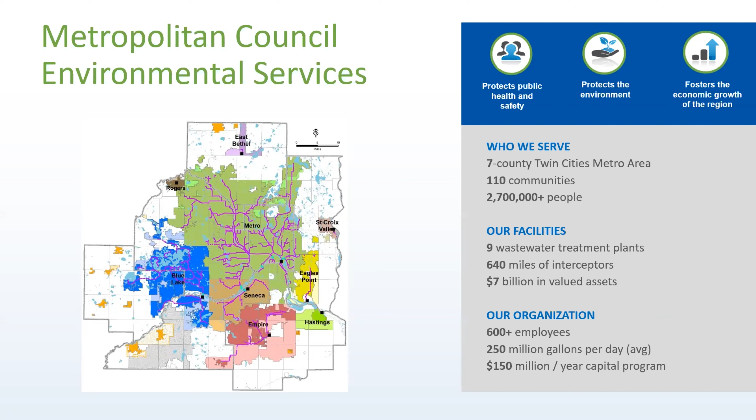And now, after this broad overview into who we are and what we do for the region, I'd like to turn it over to my colleague, Tim Wadeen, and he'll focus on our plans for the Fridley and Brooklyn Park areas. Thank you.

To begin, we would like to explain what a facility plan is. It is a document that summarizes the current state of the existing MCES wastewater facilities. It identifies the need for rehabilitating existing facilities or constructing new facilities. It also determines the potential environmental and other impacts of new facilities. It considers those factors and recommends a course of action. This document is a prerequisite to qualify for financing from the Minnesota Public Facilities Authority.

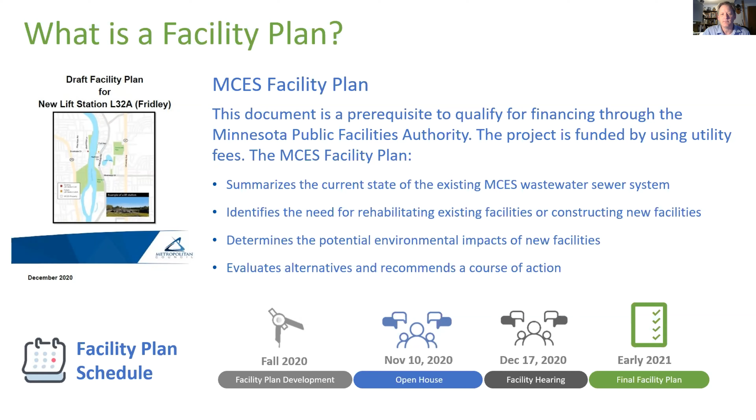There are several terms we use during our presentation and in our facility plan. A wastewater sewer system is a system of underground pipes that carries wastewater or sewage away from buildings. Cities operate their own local wastewater sewer systems within a community. MCES operates the regional wastewater sewer system that carries wastewater from city systems to our treatment plants, similar to how a freeway system carries regional traffic.

MCES interceptors are large underground pipes that make up the regional sewer system. These pipes can be either gravity pipes or force mains. A gravity pipe is a sloped pipe that carries wastewater downhill or by gravity without mechanical assistance. A force main, on the other hand, is a pipe that carries wastewater being pumped or forced uphill, as opposed to wastewater flowing by gravity.

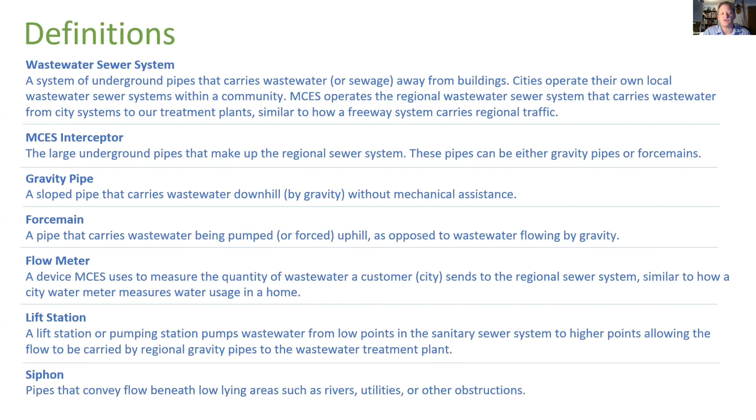Flow meters are devices MCES uses to measure the quantity of wastewater a city sends to the regional wastewater treatment system, similar to how a city water meter measures water usage in a home. Lift stations or pumping stations pump wastewater from low points in the local sanitary sewer system to higher points, allowing the flow to be carried by gravity pipes to the wastewater treatment plant. Finally, a siphon is a pipe that conveys flow beneath a low-lying area, such as a river, other utilities, or other obstructions.

Lift Station L32 is located in Brooklyn Park at 7700 Mississippi Lane North. Our proposed lift station L32A is located at 6900 East River Road in Fridley on MCES property. This was previously the site of Camp Lockeslea and is located across the Mississippi River from the existing lift station.

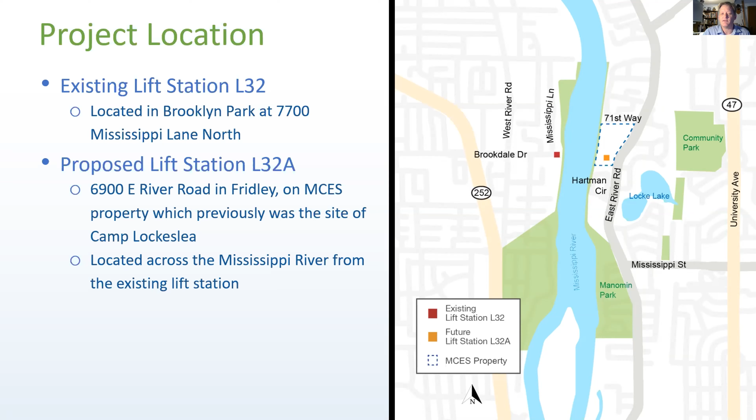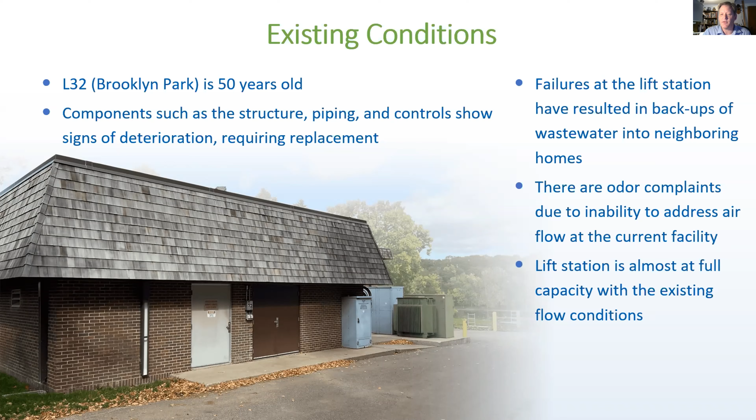Lift station L32 is about 50 years old. Components such as the structure, piping, and controls are showing signs of deterioration and require replacement. Failures at the lift station have resulted in backups of wastewater into nearby homes. There have been odor complaints due to the inability to address airflow at the current facility. The lift station is almost at full capacity with the existing flow conditions.

The conditions driving us to complete this construction project include the fact that the existing lift station is 50 years old and has reached the end of its useful life. Condition assessments have documented structural, mechanical, and electrical deficiencies that have led to system failures such as backups and odor issues. The lift station is almost at its full pumping capacity. L32 does not have sufficient capacity to serve the current or future needs of the area.

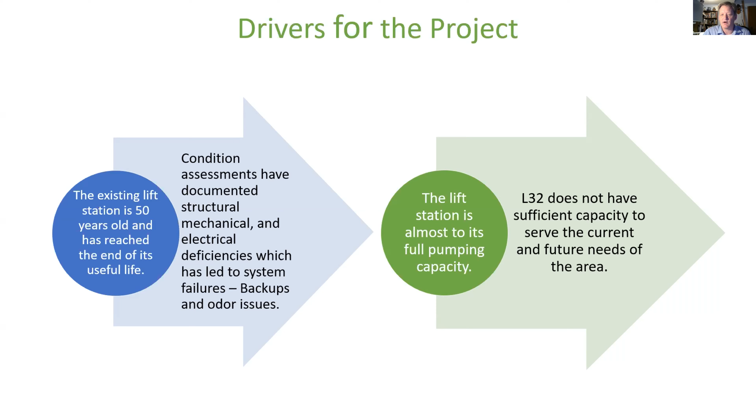As part of our evaluation, we performed an overall system analysis of the pipes leading to and from lift station L32. We determined that there is sufficient capacity upstream of L32 for future growth. We've also determined that downstream capacity is sufficient to support future growth.

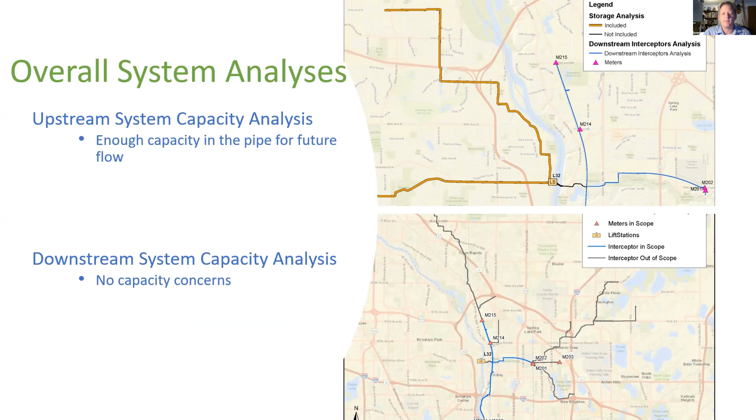Our facility plan includes an analysis of various alternatives for preventing spills at the lift station. Our design guidelines recommend a 60-minute response time under peak flows. That allows time for our staff to address any issues at a lift station that may cause the pumps to shut down unexpectedly. Under current flows, we have about 53 minutes of response time. We have determined that we need an additional 30 minutes of response time for the ultimate flow of 67 million gallons per day under peak flow conditions.

We analyzed several options to provide this spill prevention. Inline storage, or storage in the pipes themselves, is typically how we accomplish this. To provide that additional inline storage, we've determined that two small submersible lift stations could be added upstream of L32 to address lower interceptor connections.

We are also evaluating an independent pumping system to be included in the lift station that would provide additional response time. This would include high-capacity pumps that would operate independently of the standard pumps in the event of a failure. The lift station would also include traditional resiliency features, such as a split wet well system, redundant pumps, and other features that will help improve resiliency and prevent spills at the lift station.

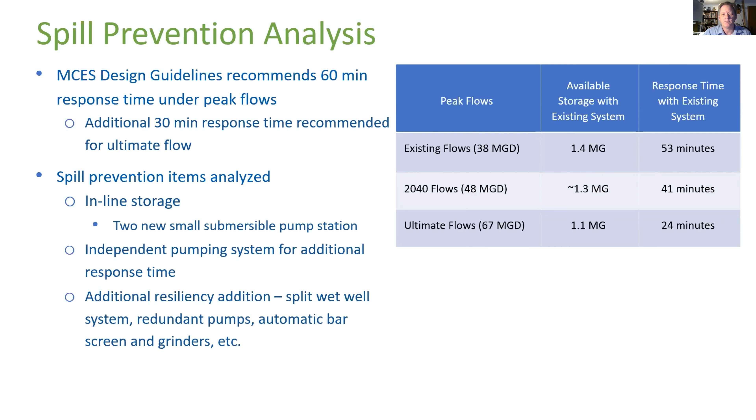For the lift station project, we evaluated three different alternatives. The first was to do nothing, to leave things as they are right now. The second alternative was to replace the lift station in its current location with a new, larger lift station suitably sized to handle the flows projected for the area. The final option was to construct a new, larger lift station on the east side of the river in Fridley, again to handle the higher flows we project for the area.

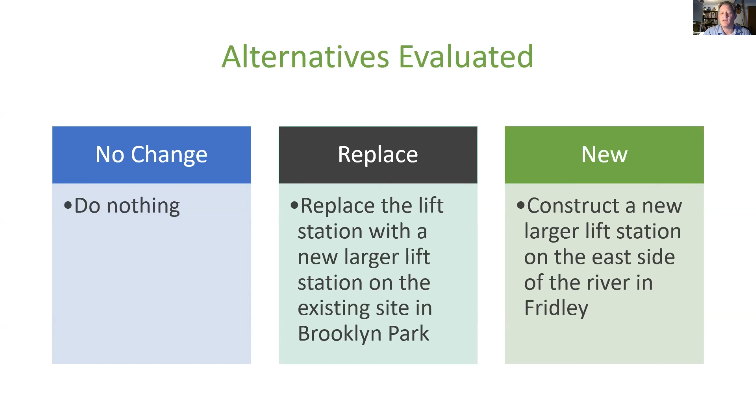Alternative 1, the do-nothing alternative, keeps the existing lift station the same size without any upgrades. The limitation to this alternative is that the station will continue to deteriorate if we do nothing. We're not fixing the problem that we currently have. Because of the continued deterioration, excessive maintenance will be needed at the lift station in the future. This will lead to increased failures at the lift station, including an increased frequency of backups in the area and potential for an overflow or spill into the environment, including into the Mississippi River.

Because of this, this is not a recommended option. It does not address environmental, health, and safety concerns such as spills. It does not meet our customer service goals. It is not recommended per our policy of providing continued and best customer service to the communities that we serve.

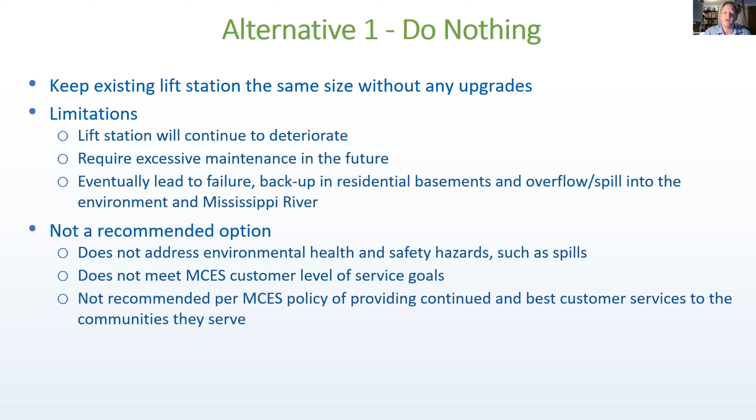Alternative 2 includes the construction of a new lift station on the west side of the Mississippi River at the existing lift station location. It would include construction of a new, larger pump station that would meet future flow and resiliency needs, including an independent pump system to help mitigate spills. Two new submersible lift stations would be added upstream of this existing lift station. Other resiliency features, such as the split wet well, would also be included. The project would upgrade the existing odor control system. We would need to maintain operation of the existing lift station while constructing a new facility. Once the new lift station has been completed, we would demolish the old facilities.

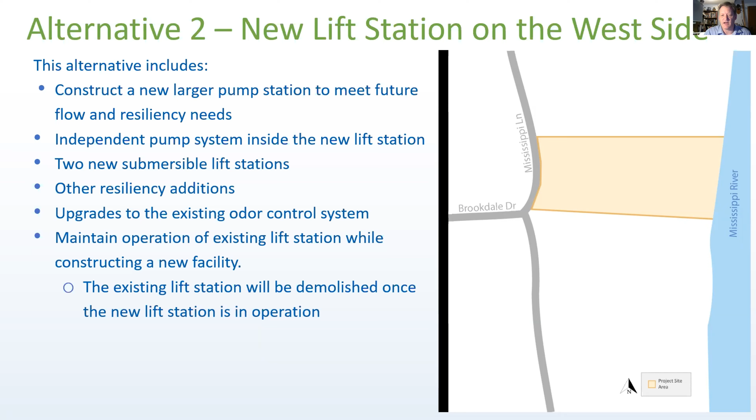This slide shows an approximate layout of where our facilities could be located if we were to try to keep them on the west side of the Mississippi River. The facilities are very large compared to the property. Setback requirements limit the space that we have available to construct a new facility at this location.

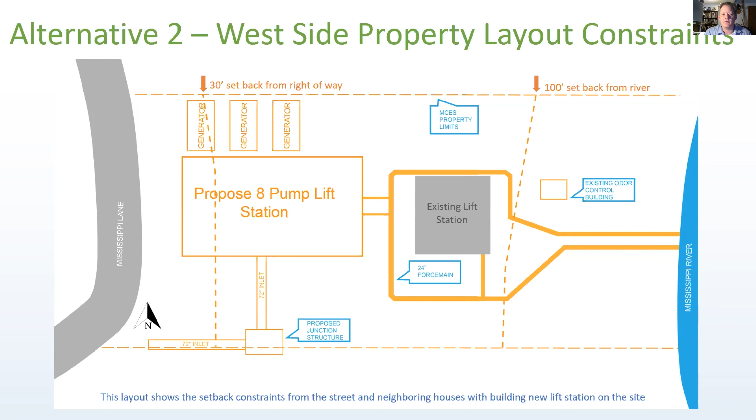Our cost estimate for this new facility includes the new pump station, new submersible pump stations upstream of L32, dedicated pumps at the lift station, odor control upgrades, and acquisition of temporary easements to allow us to construct these facilities. We estimate that this alternative would cost approximately $36 million.

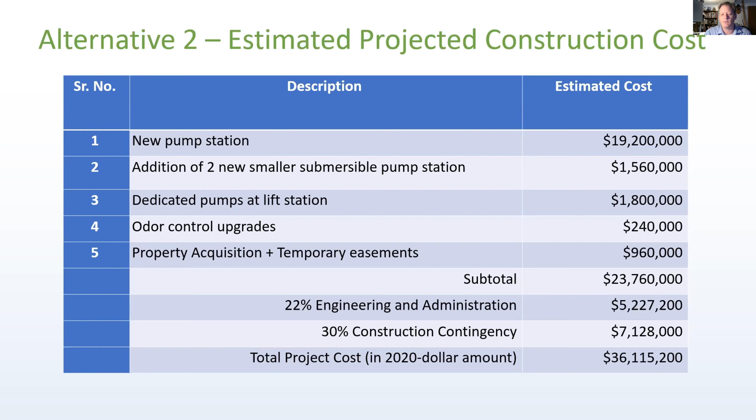There are several limitations with alternative 2. We need to keep the existing lift station in operation during construction, which limits the space available on site to construct a new facility. We need to acquire additional property, including temporary easements around our facility to stage equipment and stockpile materials. Additionally, there would be construction difficulties due to the depth of the facility. We'd need to provide sheeting to protect neighboring properties and the street during construction. Space limitations would also limit the screening in the area. This is not a recommended option.

Space constraints due to setback requirements from the river, the bluffs, the streets, and the neighboring properties limit the area that we can work in. It is very challenging to build a new lift station on this site while keeping the existing lift station in operation. Likely, we would need to purchase more property near the site to provide screening and construct the new facility. Because of these limitations, we do not recommend moving forward with the option of constructing a new facility on the existing site.

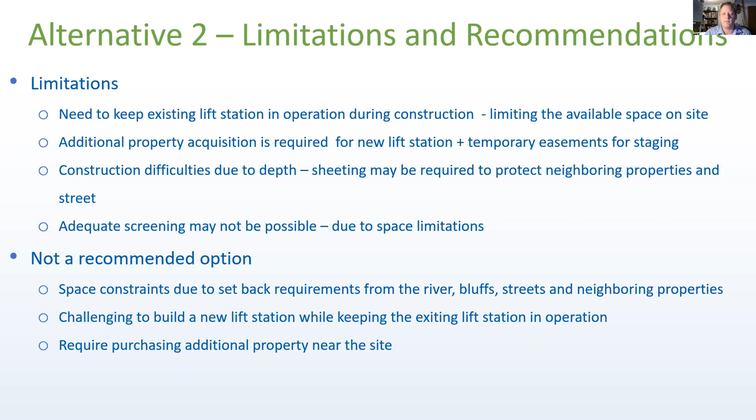Our third alternative is construction of a new lift station on the east side of the Mississippi River. This alternative includes construction of a new pump station in Fridley, an independent pumping system, and other resiliency features we've previously discussed, odor control, and flow metering.

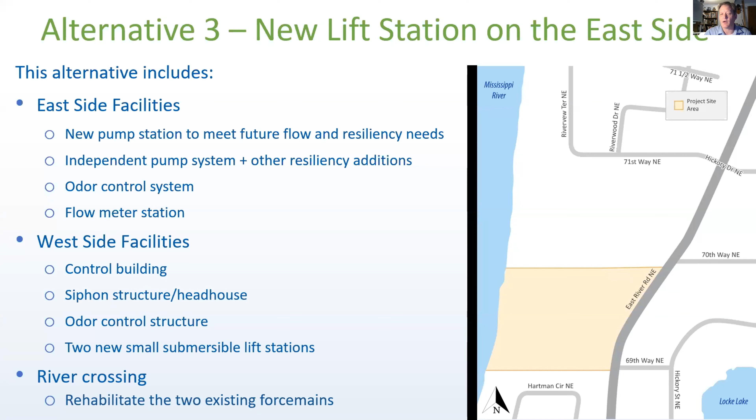The west side would still require some facilities. These would include a control building or odor control building, a siphon structure or head house to conduct wastewater underneath the Mississippi River, an odor control structure to manage the odorous air that accumulates at the siphon structure, and 2 small submersible lift stations to serve the city connections to our interceptor system. The project would also include rehabilitating the 2 ductile iron pipe force mains that cross the Mississippi River.

This is our conceptual plan showing the location of our new pump station on the east side of the river and what it would include. Our main concern is ensuring that we meet the required setbacks from the right-of-way to the east, as well as the setbacks to the west from the Mississippi River. The space we have here also allows us to provide adequate screening of our facility.

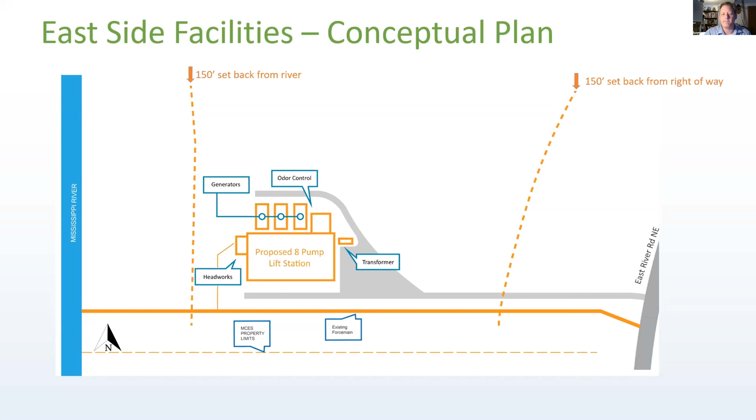This shows the facility that will be located on the west side of the river. The odor control building would be constructed in approximately the same location as the existing lift station. We would include a siphon structure that would allow wastewater to enter the siphons, which would conduct flow underneath the Mississippi River. Other minor improvements would also be included on the west side, such as site screening.

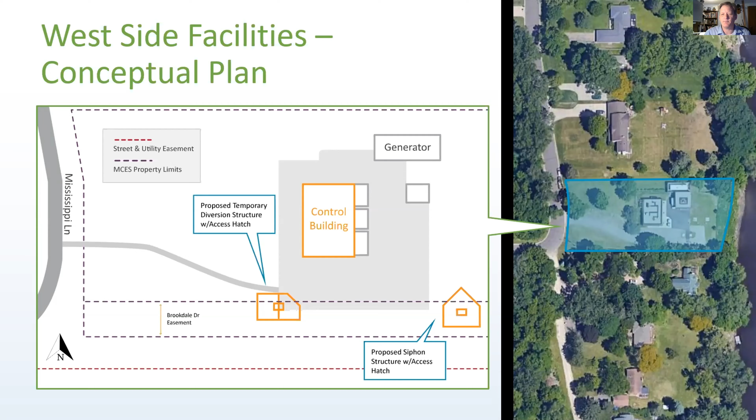Wastewater would continue to be conveyed underneath the Mississippi River through the 4 pipes located here. These 4 pipes would be converted into siphons, allowing wastewater to flow underneath the river. The 2 pipes shown in red will be rehabilitated.

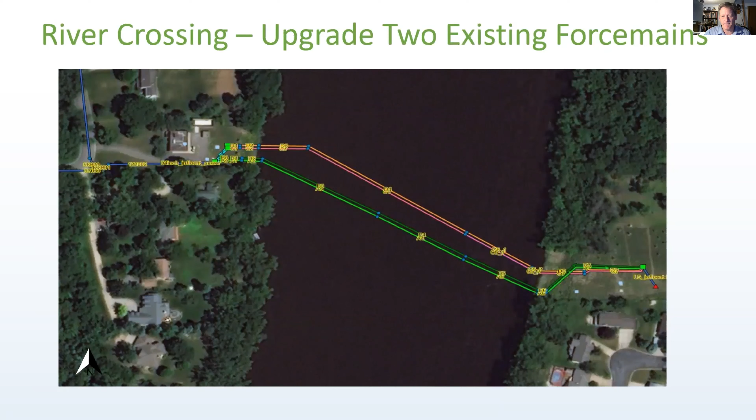The estimated cost for alternative 3 includes a new pump station, 2 smaller submersible pump stations, dedicated pumps in the lift station for spill prevention, a new odor control system on the east side of the river, flow metering, the siphon head box, odor control modifications on the west side of the river, and rehabilitation of the pipes crossing the river. Our estimate for the entire project is approximately $51 million.

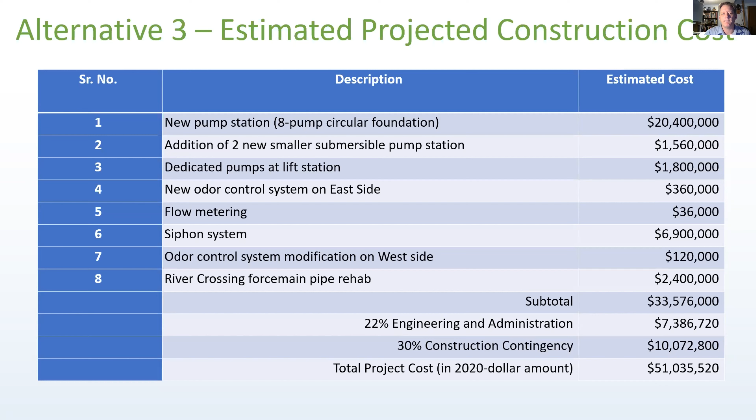Alternative 3 has some limitations. There are a number of construction challenges due to the proximity of the river and the depth required for construction of the lift station. It is also the highest construction cost of the 3 alternatives we have considered.

However, it is our recommended option. The large available space on the east side of the river allows us to meet all the requirements for building the lift station in this area. The 22-acre parcel that we own is large enough for the new lift station. We would not need to acquire any additional easements or property to allow for construction. The large space will allow for adequate screening of the facility from our neighbors. This alternative will provide a sustainable, long-term solution for conveying wastewater in the region.

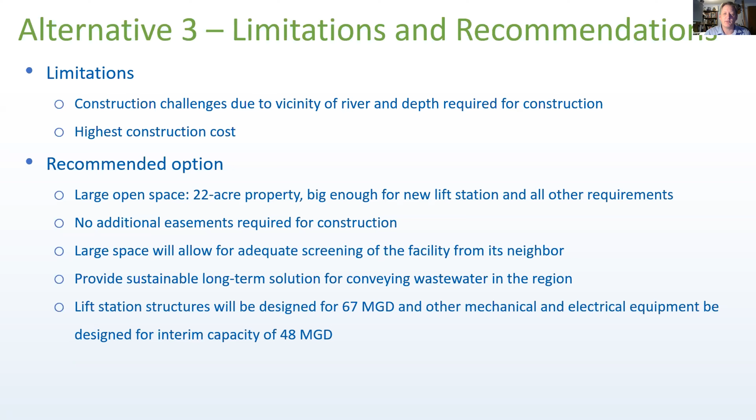The lift station structures will be designed for the ultimate peak flow rate of 67 million gallons per day. Other mechanical and electrical equipment, such as the pumps, pipes, and controls, will be designed to convey our interim capacity of 48 million gallons per day. Again, this is our recommended and most preferred alternative.

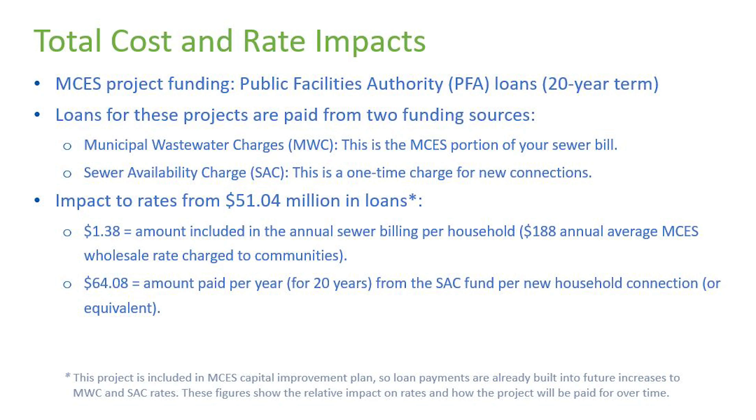With the completion of our facility plan, we will move forward with the design phase of the project. The design phase will include engineering studies investigating construction methods, or how the facility will be built. Studies will also consider what odor control technologies will best mitigate odors. We will investigate the design of the lift station and create a physical and conceptual model of the new lift station and odor control system. We will work on the architectural design of the buildings and how they fit with the character of the area. We will coordinate with local entities and stakeholders, such as the cities of Fridley and Brooklyn Park, as well as other regulatory agencies and interested parties.

We will consider various land use requirements to site our buildings. We will begin to secure permits required by different regulatory agencies. We will study site restoration needs on both the east and west sides of the river. These factors will all be considered during the design phase of the project.

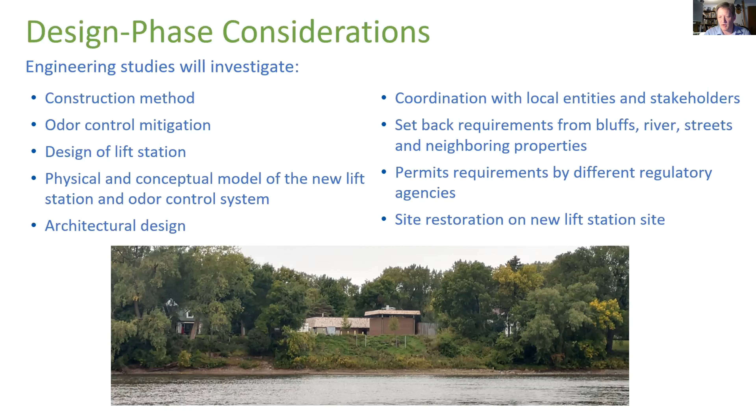Our next steps include collecting written comments on the draft facility plan. Written comments are due on December 28th by 5 p.m. In January and February of 2021, the Metropolitan Council will review the final facility plan, which will include these written comments, comments from tonight's meeting, and our responses to them, and adopt the facility plan. Once the Metropolitan Council has adopted the facility plan, we will submit it to the Minnesota Pollution Control Agency with an application for the Clean Water Revolving Fund project priority list.

At the same time, we will move forward with design of the project. That design is scheduled to last for the next two years, from 2021 through 2023. Construction is anticipated to begin in 2023 and last through 2026.